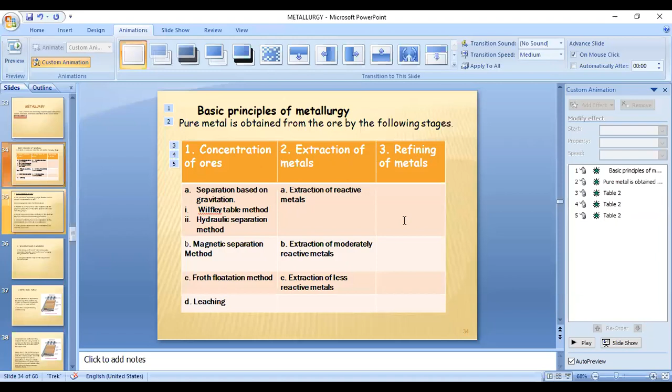Okay, we've already made this table, right, where we've studied the basic principles of metallurgy. The first one is concentration of the ores, extraction of metal, and refining of metals. Today we want to start with concentration of the ores. So let us start with concentration of the ores.

I want everyone to read. See, there's a lot of theory part involved here. We have very less of reactions when we are talking about metallurgy, the extraction processes. So there's less of reactions, lot of theory part, lot of explanation, lot of processes. So I want everybody to concentrate on the slide and listen to me carefully. After I finish one entire process, at the end of that, you can ask me questions or any doubts you have. Till then, I don't want you to get distracted and start typing any doubts. Keep the doubts to yourself. Once you are done with any one process, at the end of that, you can ask me any questions.

So I'm beginning with concentration of the ores. The process of separating the gangue from the ores is called as concentration of the ores. The concentration of ores means what? We are separating the gangue. That means I'm separating the impurities and getting the pure form of the ore. This is basically the first step, the raw material which we get directly from the mining site.

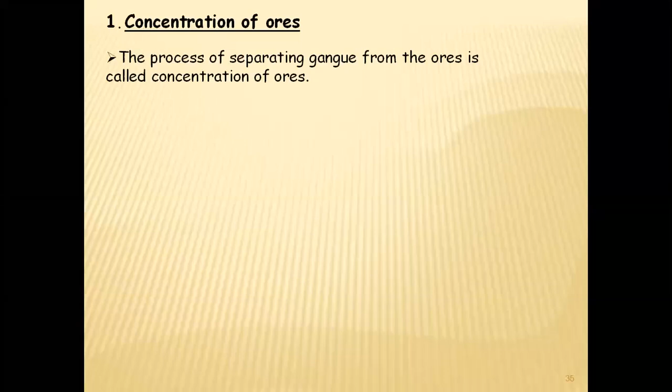Various ways can be used for this purpose. The exact way will depend upon the physical property of the metal, because we'll check what type of ore is there, which metal has to get extracted, what is the type of gangue available, what is the situation. Depending on all that, I'm going to decide which process I'm going to use. We have a lot of processes, only few of them are listed down in your textbook.

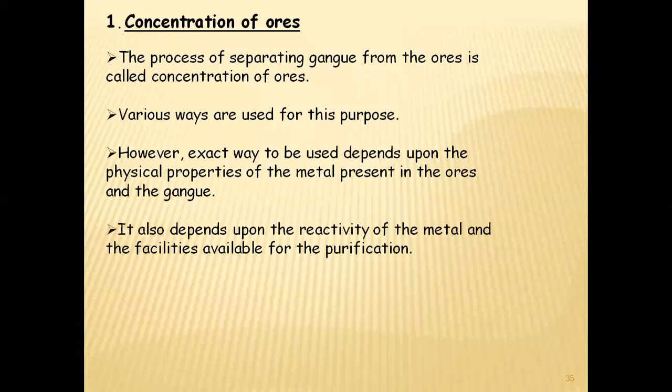Along with that, it will also depend upon the reactivity of the metal and the facilities which are available for purification. Along with that, one more important point which we keep under consideration is the environmental pollution. We need to take care that the process is not causing a lot of pollution, because that won't be accepted by the government to carry out the process.

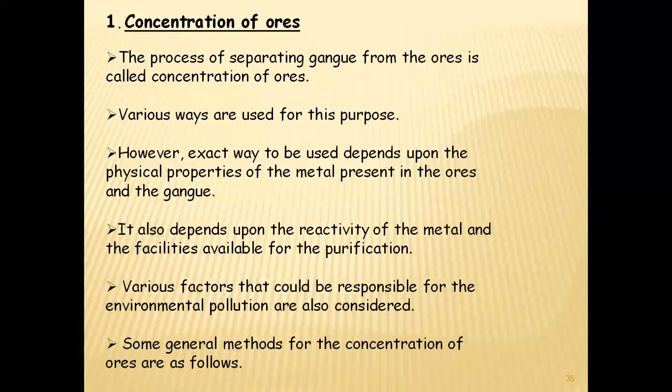Okay, so let's start with the first step. Some general methods for the concentration of the ores are as follows. The first one, like we discussed, was separation based on gravitation. Do you remember which is the first technique which we used for separation based on gravitation? What's the technique I had given in the table?

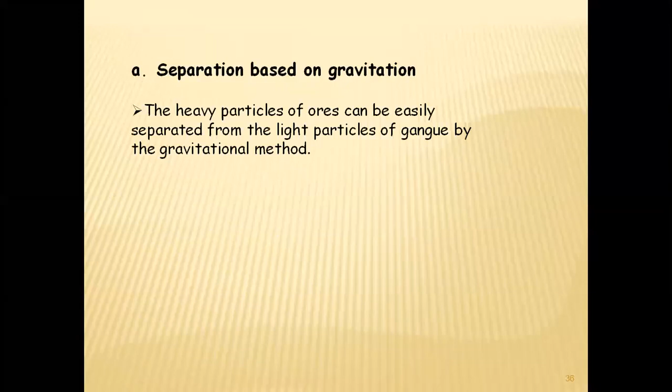Can you tell me which is the process? Anybody? Very good. It's Wilfley table method. When I am talking about separation based on gravitation, the heavy particles of the ores can be easily separated from the light particles, obviously because of the gravitational method. The process to carry out the separation are as follows. So the first one is Wilfley table method.

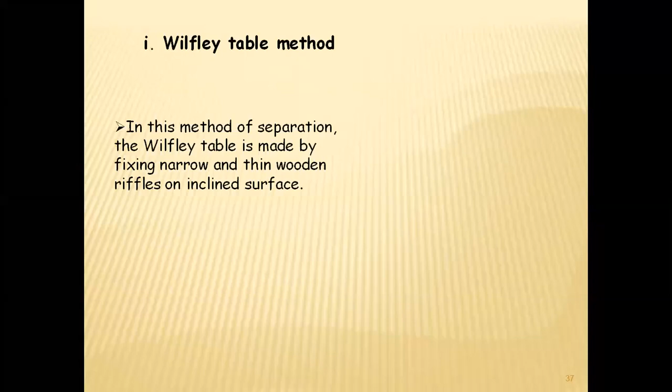Riffles means बीच में ऐसे छोटे. It's like a step, a small step. Are you getting my point? You know na staircase. Staircase कैसे होता है? Flat surface, then a little above. Same way, these are a little inclined where we have riffles, that is the slits in between. Now this table is kept continuously in the vibrating manner.

You have seen the sieving technique. Sieving सबको पता है क्या होता है? छन्नी से छानना. Channi, do you know the sieve? Meaning of sieve, everyone? Yes, it's kind of a sieving technique where we are sieving. You might have seen in rural areas where agriculture is happening, farming is happening. They sieve the wheat to get rid of the husk which is there on that, right? Similarly, in that way, it is Wilfley table method.

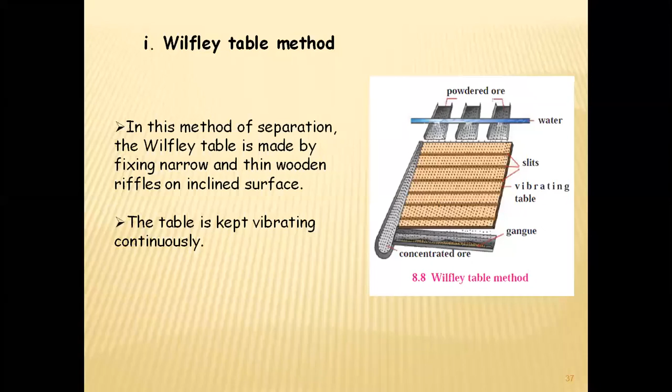So in this technique, my dear students, the powdered ore which is obtained from the lumps of the ore, जो raw material हमको मिलता है, using a ball mill. Ball mill is, you know what? It's the mill, just like the chakki we have, which grounds the ore on the table, and a stream of water is also released from the upper side. Can you see the stream of water? First, we have three sections there from where the powdered ore is coming. Then we have the water section, and the ore along with the water is allowed to pass in the slanting manner in the Wilfley table method.

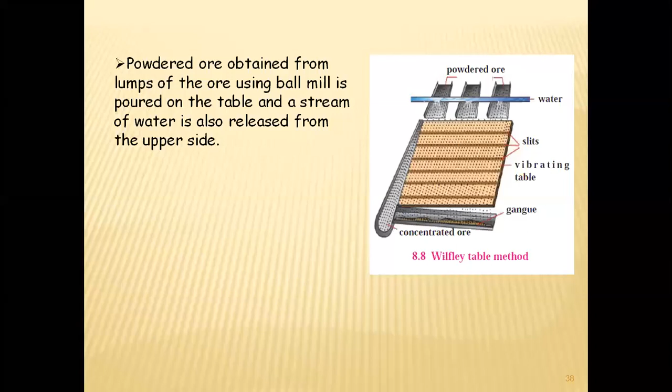And because of the arrangement in this way, this results in the lighter gangue particles being carried along with the flowing water, while the heavy particles in which the proportion of minerals is more, जहाँ बहुत सारा mineral है and less of gangue is there, get blocked by the wooden riffles and get collected on the slits between them. I'll repeat myself once again. What is exactly the meaning of Wilfley table method?

To understand this technique, you need to get the concept of sieve in your mind. You know the wooden sieve which they make with the help of these bamboo sticks? So wooden sieve hota hai, it's exactly like that. I am putting the ore from the top along with water. The ore along with water, both are coming down in the sieve. अब ये sieve कैसा है? Inclined है, means slanting, and in between there are slits.

अब ये slits की वजह से क्या होगा? The heavy particles will get stuck there. The heavy particles of the ore, which is actually containing the main metal, the mineral, जिसमें सबसे ज़्यादा ore है, जो important part है, that will get stuck into the slits. और जो lightweight particles, which is the gangue, which are the impurities, which is not required, will flow away with the jet of water which is coming from the top. And the impurities will get collected in the bottom part. वो निकल जाएगा in the form of gangue.

And if you see at the left hand side, we have a section which is for the concentrated ore. That concentrated ore I will scrape. जैसे एक finger से हम निकालते हैं ना, वैसे slit से it is going to be removed. With the help of a spatula or a spoon or whatever it is, they will remove the main ore and get it on the left hand side, which is the important mineral part. And the impurities will come down with the help of water.

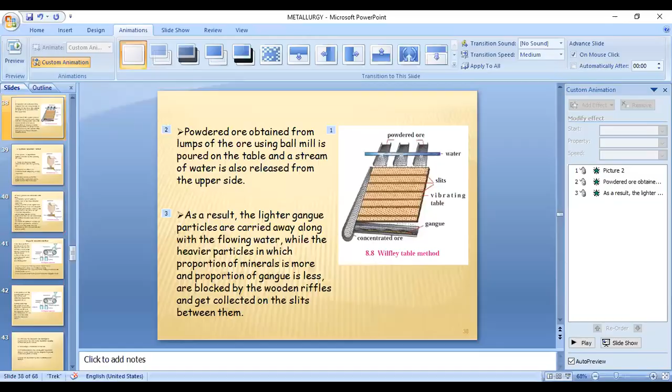How will you come down? Can you see the riffles in between? You get one step down, one step down, one step down, just like that, not that much gap, just like the staircase. Usme itna gap nahi hota jaise staircase me hota hai. Very small gaps, but yes, those are gaps in between.

And then from the top, I have powdered the ore using the ball mill technique along with water. Water is at a very high speed, it comes down. To jaisa hi wo speed me aayega, jo light hoga, jo light in weight hoga, that will easily flow with the water. Aur jo heavy hoga, that will get stuck in between. The particles which are sticking in between, the heavy particles, that is containing main proportion of minerals and less of gangue.

See, is technique se humko metal nahi milne wala hai. This is the beginning, we are starting from the first step. Jo raw material mining site se aayega, usko ek step pehle karna padega. Then there is a lot of steps. Like this is the first step, which is concentration of the ore. Then I have extraction of the metal, and then I have refining. After doing all this, we complete the process of metallurgy, which means that I'm extracting the metal in the pure form. Getting my point? Isme bhi jo concentrated ore humko mila hai, wo 100% pure nahi hai. Usme aur impurities aayega, because that's the first step. Then after I do the second step, I will again get rid of more impurities.

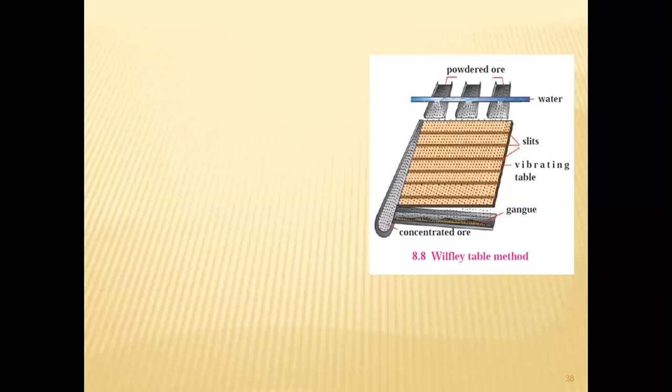Clear, everyone? Is the Wilfley table method clear to you?

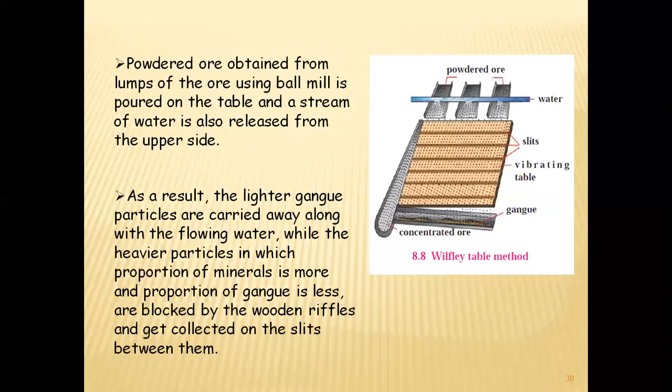So the next method which we are going to do today is the hydraulic separation method.

Yes, I'll revise once again. Do not worry, let me finish.

Gangue means impurities. Yes, heavy ore is left on the side.

TK Mohan, whoever you are, don't force me to throw you out of the class. Please behave yourself. Today I am actually getting the feeling of sitting inside a classroom and talking to you people.

Yes, Urvi, yes. Slits, riffles means slits. Thank you, Mayank.

So the next technique we are talking about is the hydraulic separation method. Ab ye technique bhi separation based on gravitation pe depend karta hai, right?

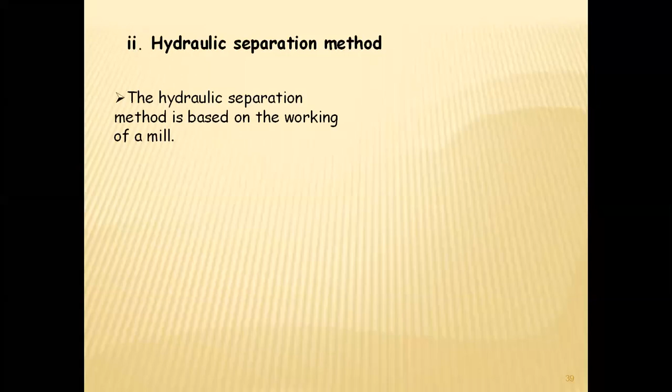So the hydraulic separation method is based on the working of a mill, the technique of the mill. Agar main exact tumko idea dun mill ka, to kya tum kabhi chakki wale ke paas gaye ho? Gaye ho? Uska dekha hai kaisa hota hai? It is a wide mouth on the top, tapering at the end. You put the wheat and you get the flour from below.

Sorry students, just give me a minute. I think I have to throw a few students out of the class. Just give me a minute, please.

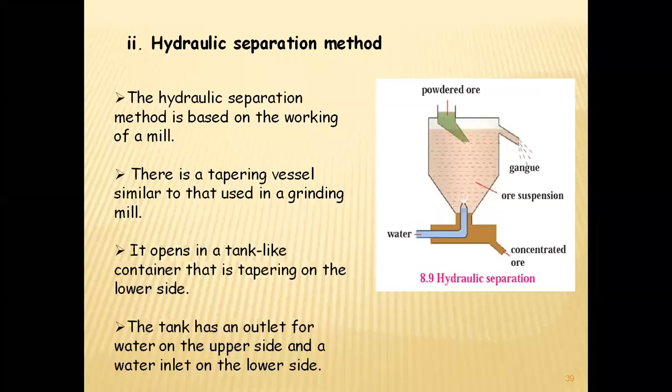Once I put the ore, a forceful jet of water is introduced in the tank from the lower side. If we fix a water pipe at speed from the bottom, the force will push upward. The lightweight gangue particles come on top because whatever is light will stay at the top, and therefore the top particles are easily removed from the outlet given for gangue. On the lower side, the heavier particles are collected at the bottom, which is made for the concentrated ore. This method is based on the law of gravitation: whatever is heavy goes down, whatever is light goes up. Because of the difference in particle weight, we are easily able to separate the gangue and the ore with the help of water.

We use water because first of all, these techniques need to be looked at with cost cutting in mind, because we don't want expensive techniques to extract the ore, otherwise our metal will become expensive. So if the metal is becoming expensive, we try to make use of techniques which are easily and cheaply available. In this technique, if you observe, we are not using any chemicals, only the force of water. Only the force of water is helping separate the ore and the gangue, isn't it? So it's very easy to use this.

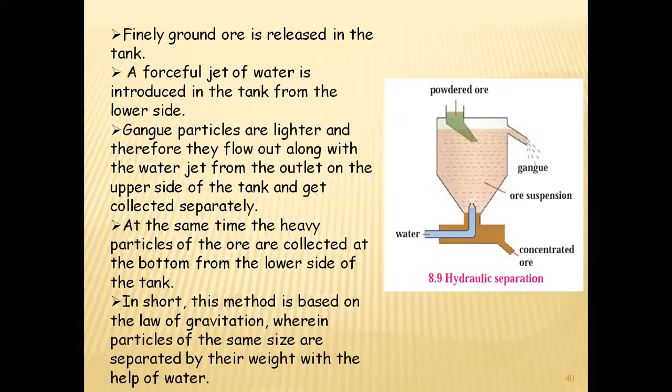I think looking at the diagram, everybody is able to understand what we are going to do in this experiment.

Yes, ores have impurity as well. So we were talking about the magnetic separation method.

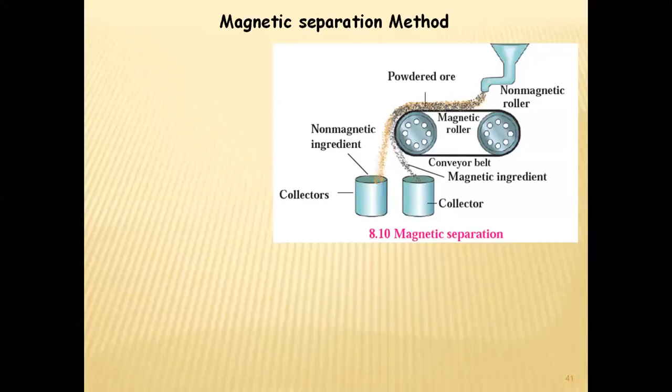So how are we going to continue with the process? This machine contains two main important parts: these are the two iron rollers, which are on the conveyor belt, which is continuously moving around them. Do you know what's the meaning of a conveyor belt?

Have you heard about this conveyor belt before? Yes, like in airports where your baggage is going on the belt, that is a conveyor belt.

And you might have gone to malls, definitely everyone has gone to malls, at security checking you keep your bags and that goes inside. That is called the conveyor belt, which is usually made up of leather or brass.

All right. So then one of the rollers is made magnetic and the other one is non-magnetic. Why do we do that?

And like I said, the conveyor belt is usually made up of leather or brass, and the powdered ore is poured on the conveyor belt from the non-magnetic roller side. See, the back side is non-magnetic, the front side is magnetic.

So when the ore is put, two collector vessels are placed below the magnetic roller. The particles of the non-magnetic part in the ore are not attracted towards the magnetic roller, right?

Will the non-magnetic content stick to the magnetic roller? No, it will move away from that. So it will immediately fall into the collector which is placed slightly away from the magnetic roller.

And the magnetic content will stick to the magnet and it will move. But for how long will it stick? As soon as the conveyor belt moves forward, ahead there is the non-magnetic roller, so it will not connect again and it will fall into the other collector.

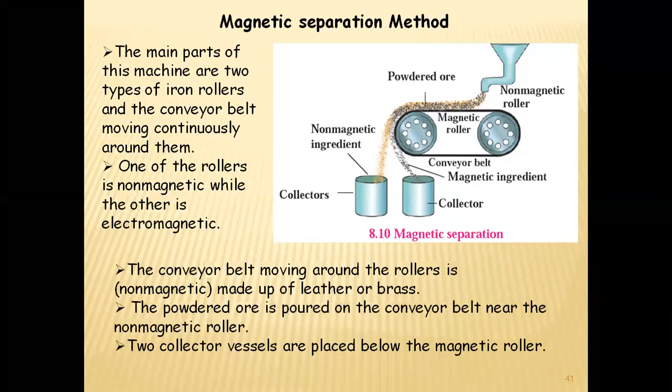See, I cannot keep the conveyor belt magnetic. A few questions have been asked to me. I cannot keep the conveyor belt magnetic, which is not possible, because अगर वो conveyor belt ही magnetic होगा और उसको ही stick होके रहने वाला है, the ore is going to stick onto the belt. It will never fall into the collector, isn't it? That is the first thing.

Second thing, one is non-magnetic and one is magnetic. तो magnetic की तरफ जो attracted रहेगा, it will attract till it is coming on the magnetic roller. जैसे ही it will move ahead and move towards the non-magnetic side, it will lose the connection from the conveyor belt and fall into the collector. The gangue is not magnetic. The ore is magnetic.

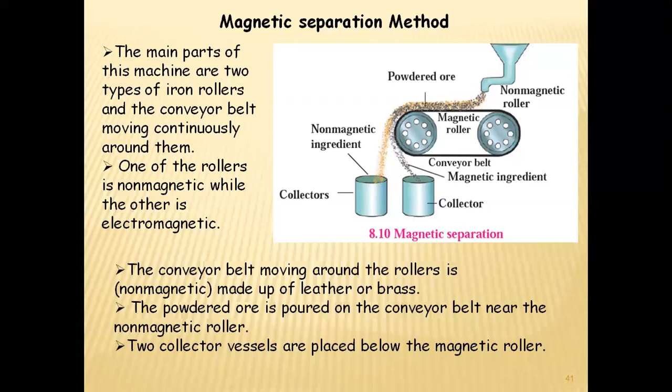So the main part of this machine, I said there are two rollers. One is magnetic, one is non-magnetic, moving on the conveyor belt. And the conveyor belt is made up of leather or brass. I put the ore from the top. And when we do that, the particles of the non-magnetic part in the ore are not attracted towards the magnetic roller.

Right? थोड़ा तो बाहर गिरेगा ही, जितना अच्छे से डायग्राम में दिया है वैसा नहीं होने वाला है, थोड़ा तो जाएगा. Where can we put it, on the top again? Yes, we can put it again on the powdered ore, isn't it? And at the same time, the particles of the magnetic ingredients stick to the magnetic roller and therefore fall in the collector vessel near the magnetic roller.

Looking at this diagram, you might come up with a lot of techniques कि मैम ऐसा भी कर सकते हैं, वैसा भी कर सकते हैं. But students, सब करने के बाद ये technique आया है. When you actually do it, that is the time when you understand what difficulties you are facing.

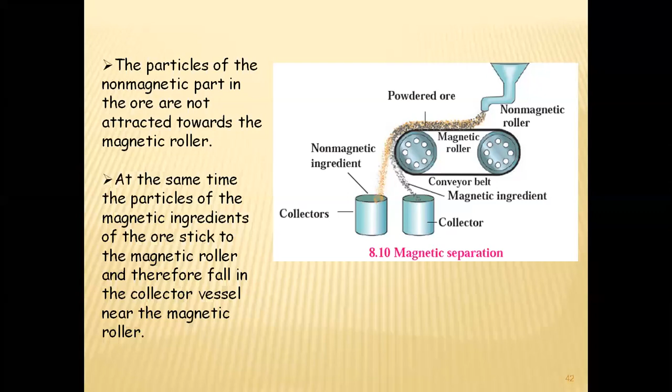कौन से ore magnetic होते हैं? Good question. To answer this question, as I said, this technique is used to separate magnetic and non-magnetic ingredients depending upon their magnetic nature. The example here is cassiterite ore.